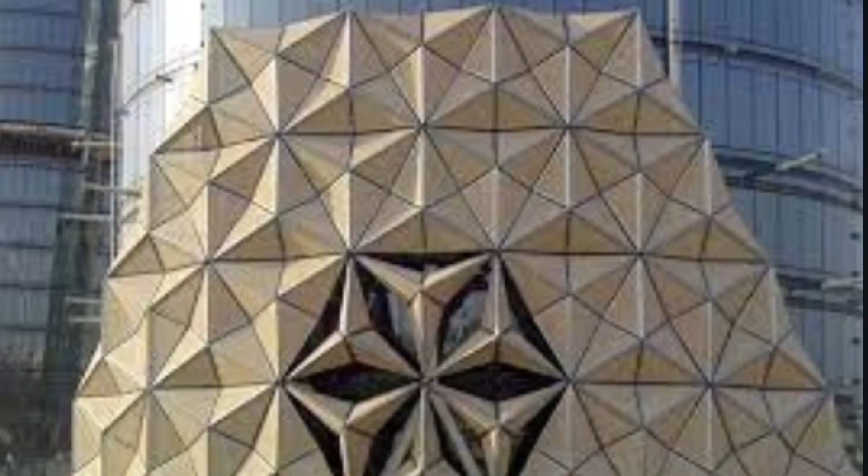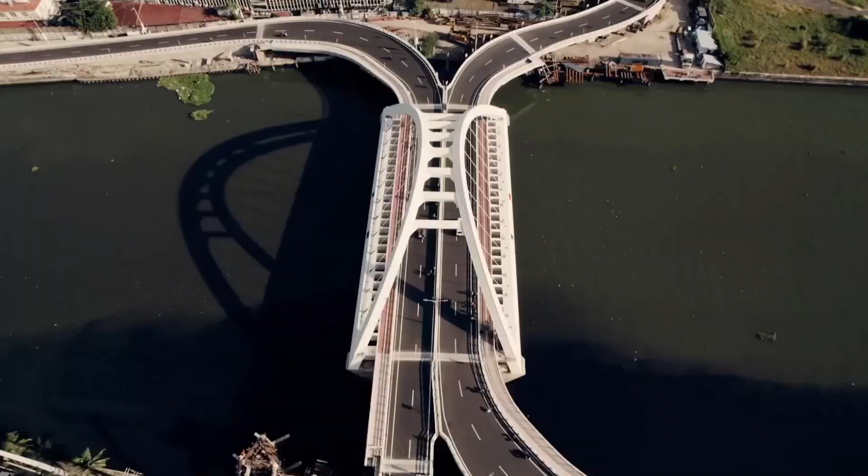The Philippines only has two seasons, dry and wet, and for almost half the year experiences drought and hot weather due to climate change and global warming. Scientists predict future changes will include warmer atmospheres, a warmer and more acidic ocean with higher sea levels, and larger changes in precipitation patterns. The extent of future climate change depends on what we do now to reduce greenhouse gas emissions. So we need to make our houses cooler for people to naturally live in extreme weather.

How do you ask? Well, did you know that these little guys are responsible for making buildings cooler inside rather than out?

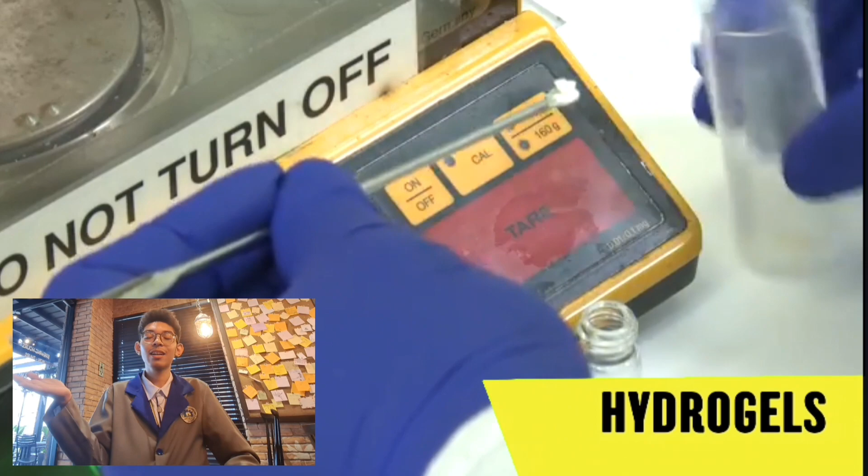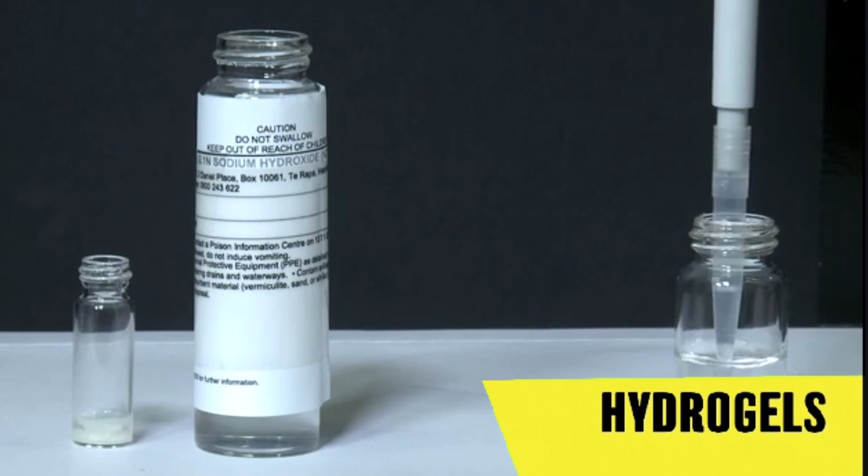These are called hydrogels, three-dimensional networks of cross-linked polymers that have been heavily saturated with water. When hydrogels are mixed into concrete, they can release the water they have stored to accelerate the curing process. This results in less volumetric shrinkage and cracking, extending the service life of the concrete.

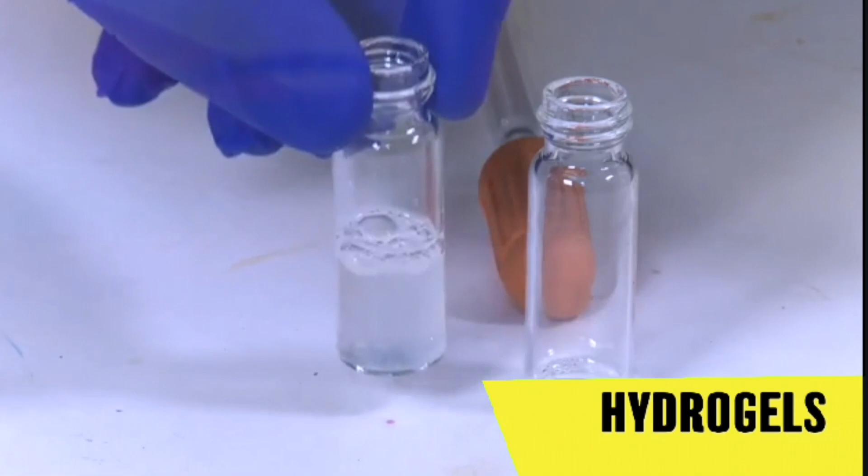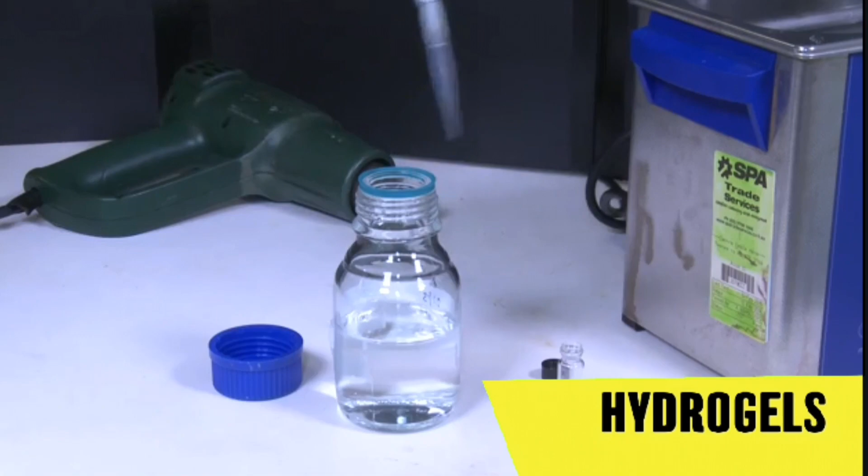Because hydrogels retain moisture, necrotic and infected tissues can be debrided painlessly, and full healing is gradually encouraged. They are suitable for wounds with low to moderate exudation because they have high water content and are not totally absorbent. These hydrogels are then used for constructing hydroceramic that is placed in place of cement in creating buildings.

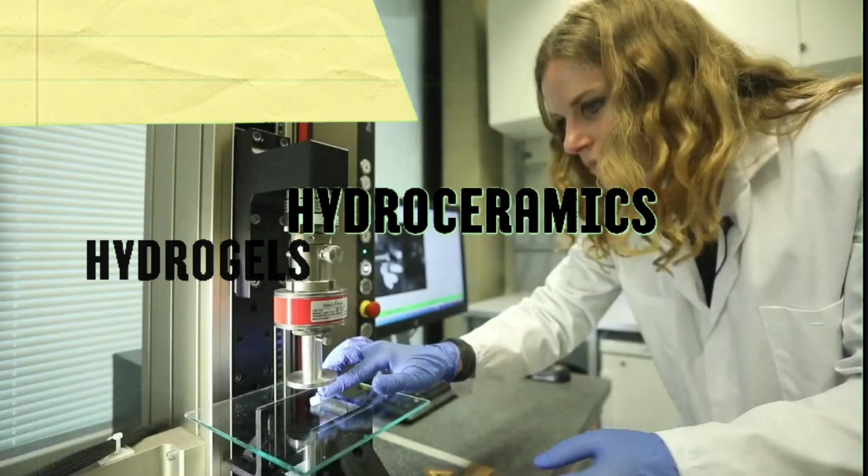When hydrogels are mixed into concrete, they can release the water they have stored to accelerate the curing process. The Hydroceramic project seeks to understand how hydrogel materials can be used to passively address thermodynamic processes in buildings. These materials include hydroceramic cement.

It is also a monolithic solid composed of concentrated NaOH solution and metakaolin. It is created by hydrothermally curing a combination of inorganic waste, calcined clay, vermiculite, Na2S, and NaOH with water.

Hydroceramic. Hydrogel is a polymer which expands in water to 400 times its volume.

Hydrogel is 98% water, so it evaporates and cools down the surroundings. As it loses water, it gets smaller and turns back to its original solid state.

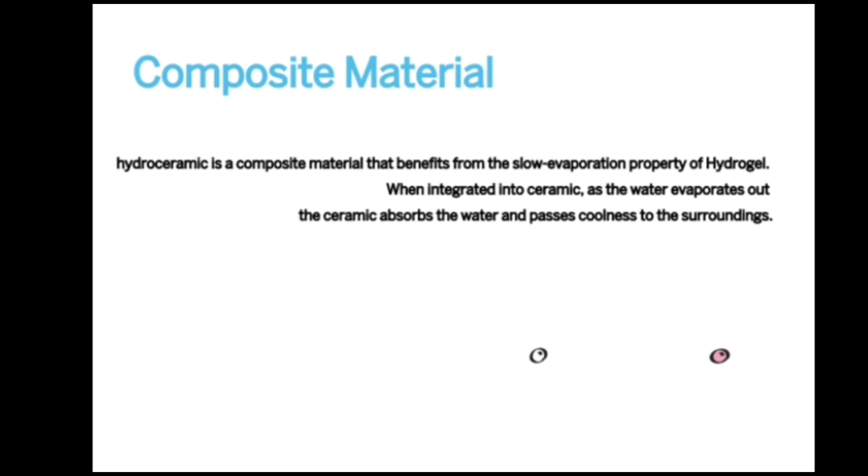Composite material: Hydroceramics is a composite material that benefits from the slow evaporation property of hydrogels. When integrated into ceramic, as the water evaporates out, the ceramic absorbs the water and passes coolness to the surroundings.

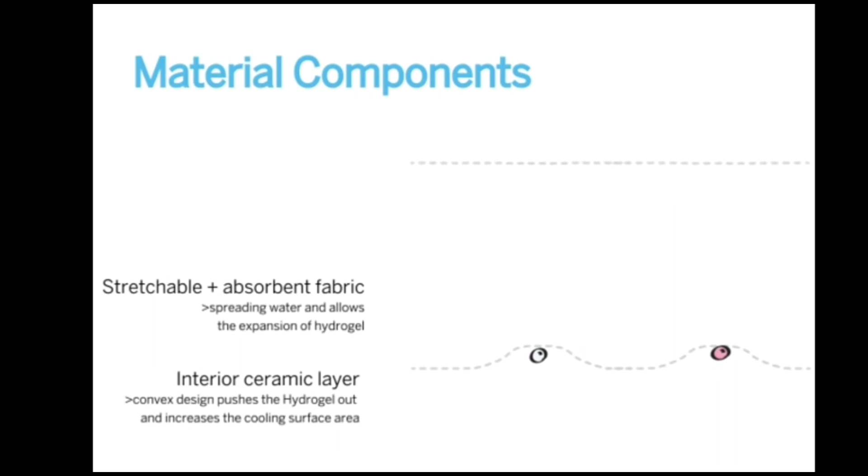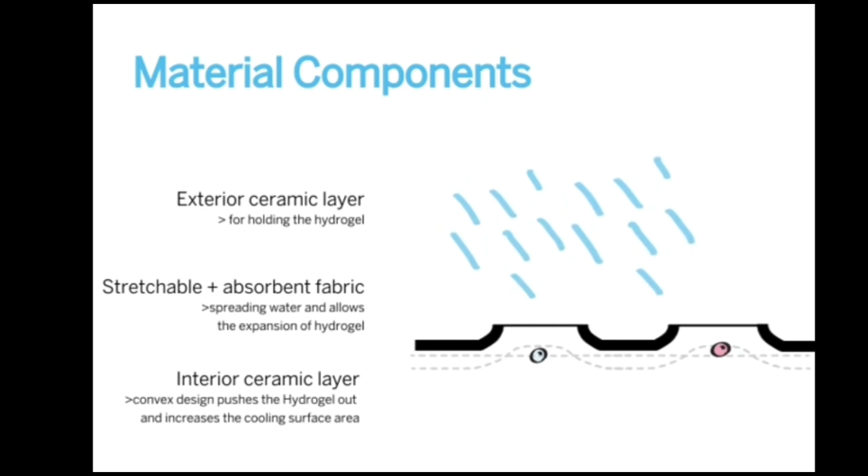Spreading water and allowing the expansion of hydrogels. In the exterior ceramic layer, it holds and folds, holding the hydrogels in place. Evaporation cools down the surroundings in combination with ceramic porosity, and hydroceramic performs as a cooling system for buildings.

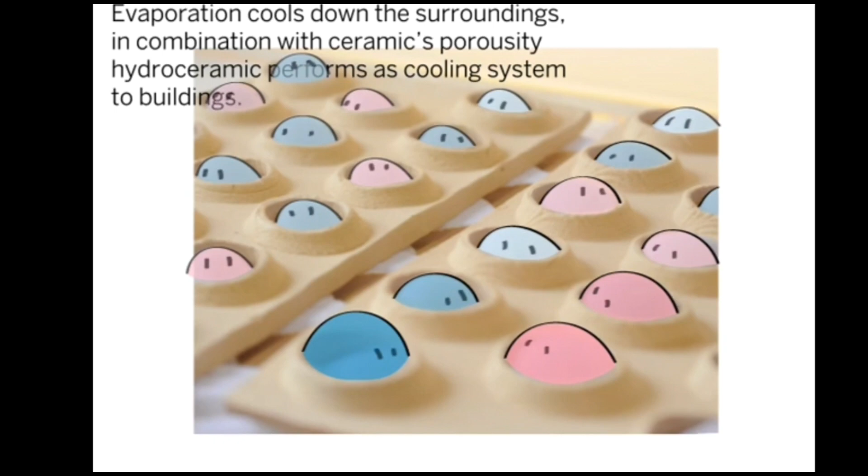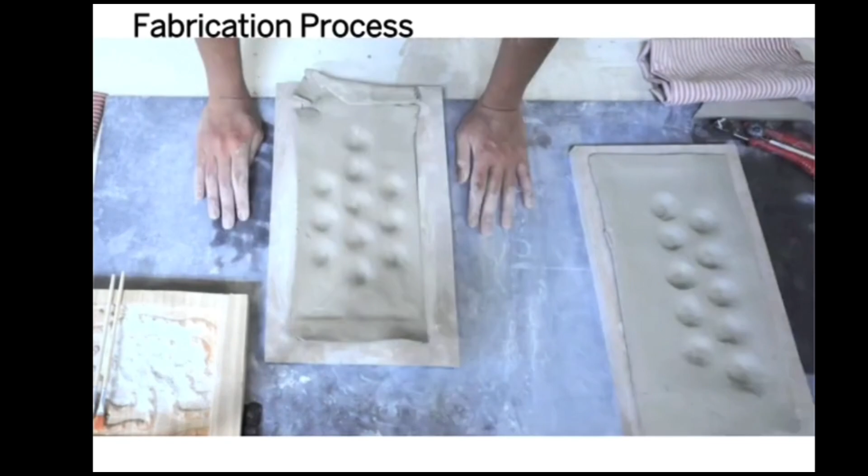These are some examples of the fabrication processes that the hydrogels undergo. It is then baked at 1000 degrees Celsius.

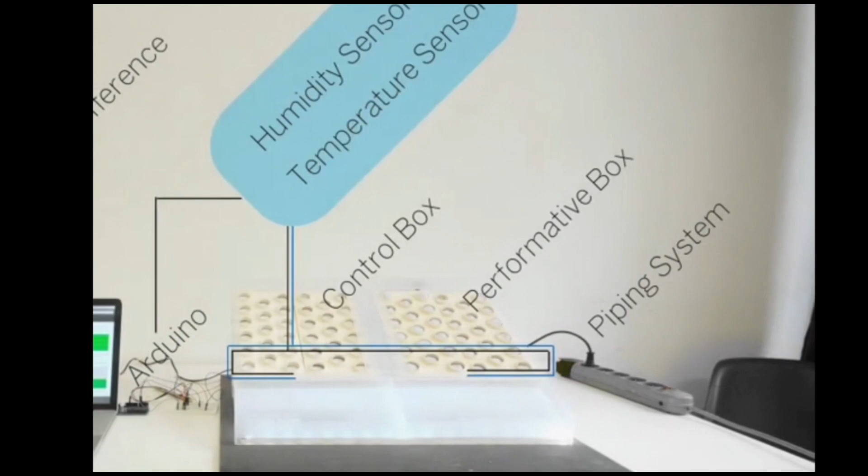It is then tested as a performative prototype versus the control group. Here you can see the different methods scientists use to measure or test whether the hydroceramic gels are capable of the hydroceramic process. Manufacturers also measure the humidity and temperature of the hydrogels, which are then graphed to differentiate whether the hydrogels are compatible for construction use.

Moving on to how engineers and scientists use the benefits of hydrogels.

Hydroceramic can take the place of air conditioning, which lowers the temperature inside by 5 degrees Celsius. Due to the hydrogel's capability to absorb water up to several times its weight, temperature can be lowered.

Researchers have found that the shape and chemistry of hydrogarnet crystals form at a high temperature, about 200 to 350 degrees Celsius, in cement-based hydroceramic materials with additions of alumina and silica. The hydrothermal C-A-S-H, or CaO, Al2O3, SiO2, and H2O.

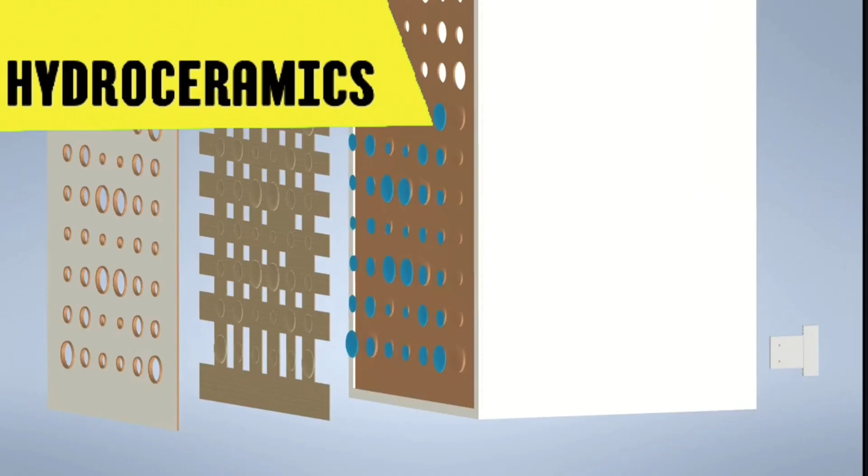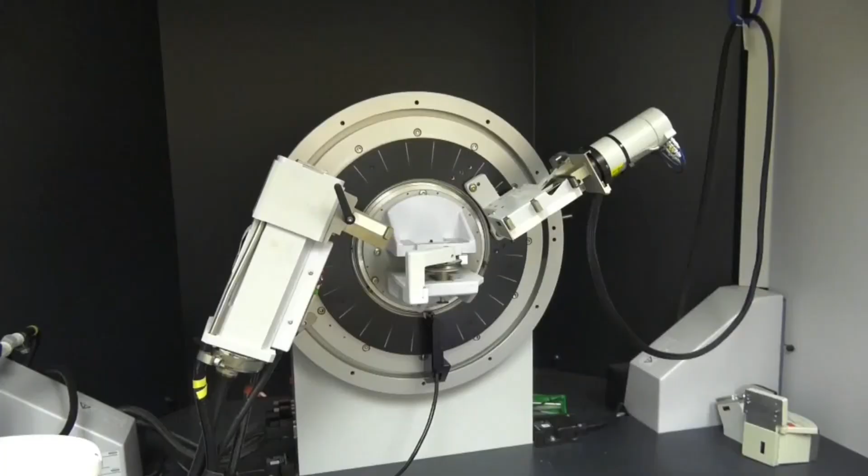X-ray diffraction or XRD data have been analyzed using the Rietveld method to determine the composition parameter Y. Minor elements including Fe, Mg, and S are present in the hydrogarnets according to electron probe microanalysis or EPMA. The hydrogarnet composition inferred from XRD was validated by EPMA data. It is seen in both octahedral and tetrahedral forms. Higher minor element concentration is linked to the tetrahedral shape.

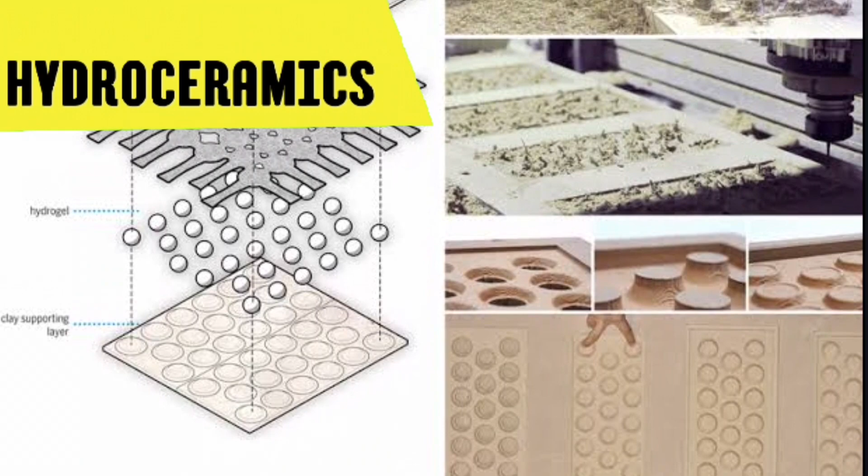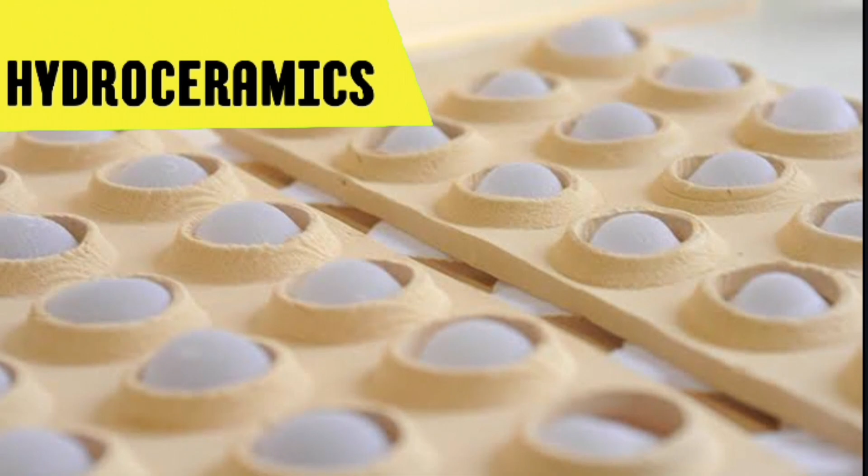In simpler terms, when the powder components are mixed with water, a hydration reaction occurs. The hydraulic calcium compounds react with water to form calcium silicate hydrate or CSH, and calcium aluminate hydrate products. Other calcium aluminate hydrate phases like CH and CASH can also form. The composition depends on the powder components and the activators used. These additional binder phases enhance strength and durability.

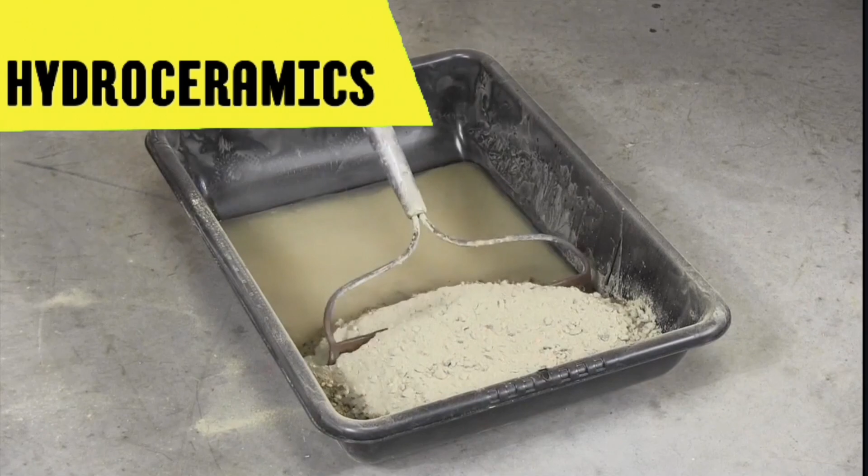Hydroceramics also contribute to the goal of the passive cooling technique, which is to reduce the summertime surface temperature and make cities feel cooler. The engineers created a porous ceramic passive evaporative cooling wall or PECW with a high capacity to absorb water for the cooling effect to work.

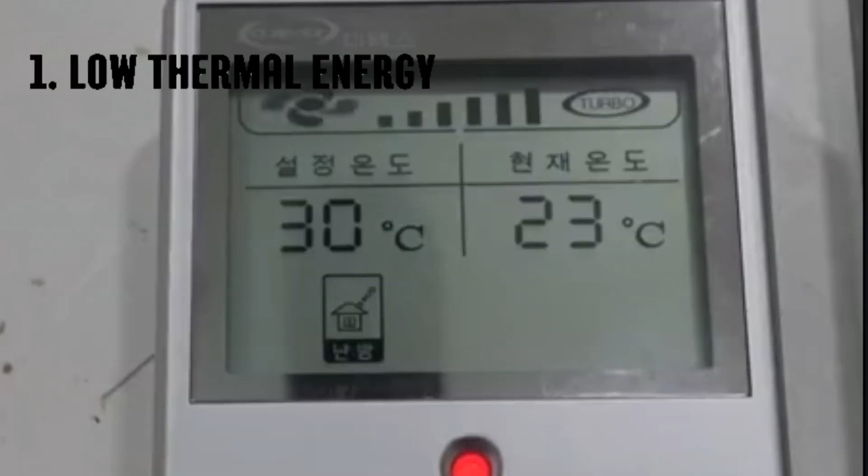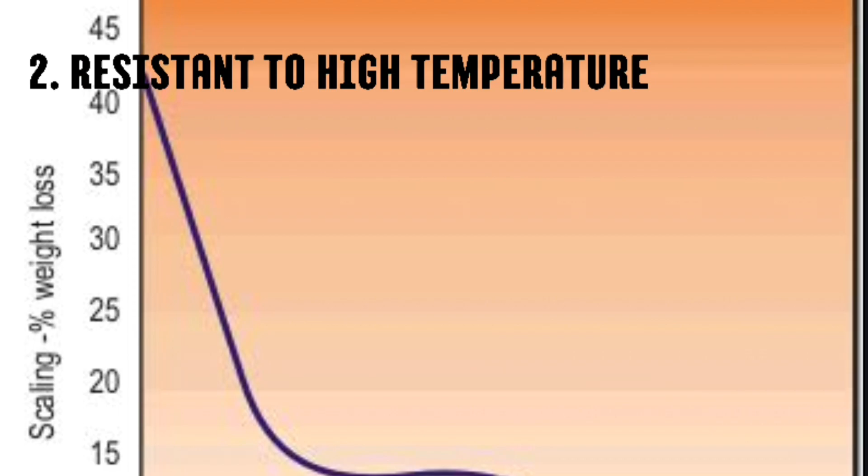Here are some advantages and disadvantages of using hydroceramic cement. Let us first go on to the advantages of hydroceramics. Number 1 is low thermal conductivity. Hydroceramic cement has a very low thermal conductivity, making it useful for insulating applications. This helps reduce heat transfer and energy costs. Number 2, it resists high temperatures. It maintains its strength and integrity even when exposed to very high temperatures over 1000 Celsius. This makes it suitable for applications like fireplace insulation.

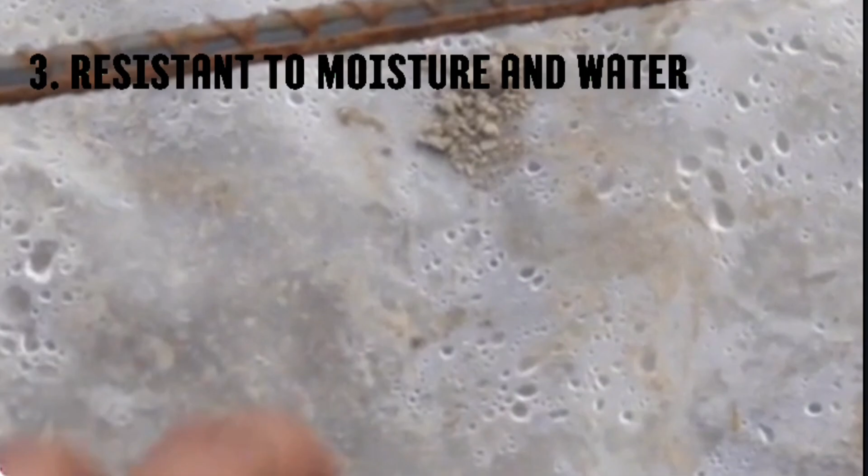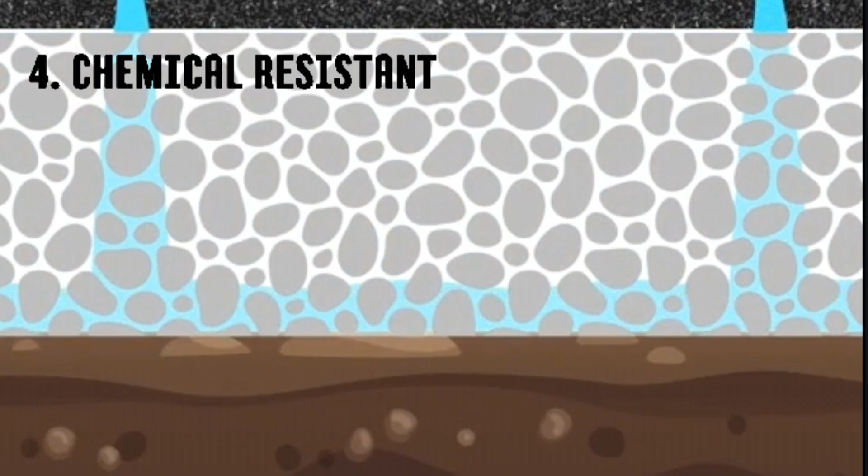Number 3, resistant to moisture and water. The hydroceramic cement is water resistant and does not degrade easily in damp environments. This durability makes it good for outdoor applications. Chemical resistance. It is resistant to degradation and corrosion from exposure to acids, alkalis, and many other chemicals. This allows it to be used in hazardous chemical environments. And lastly, low density. Hydroceramic cement is lightweight with a porous structure. This results in light construction and reduced structural loads.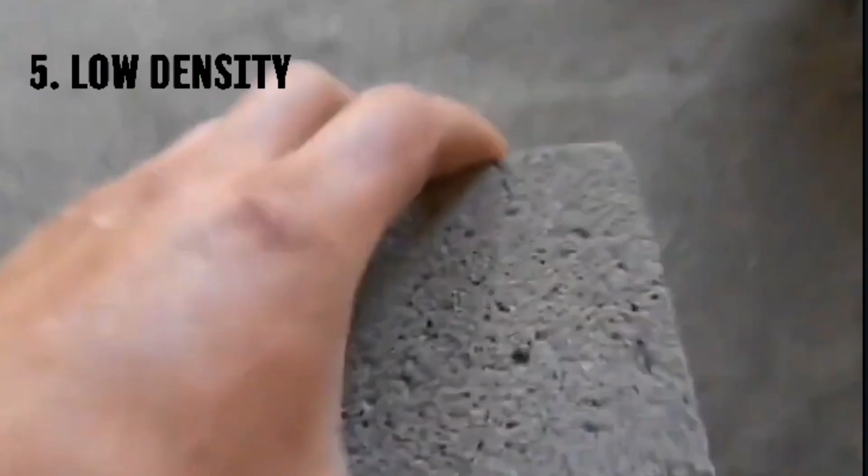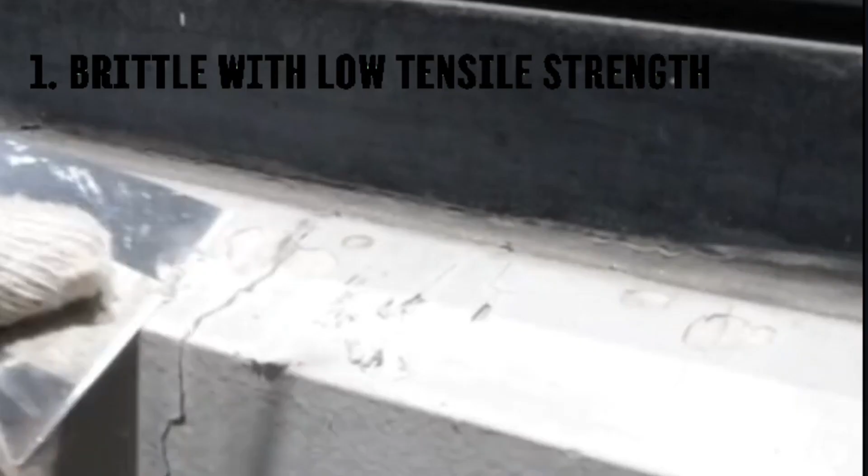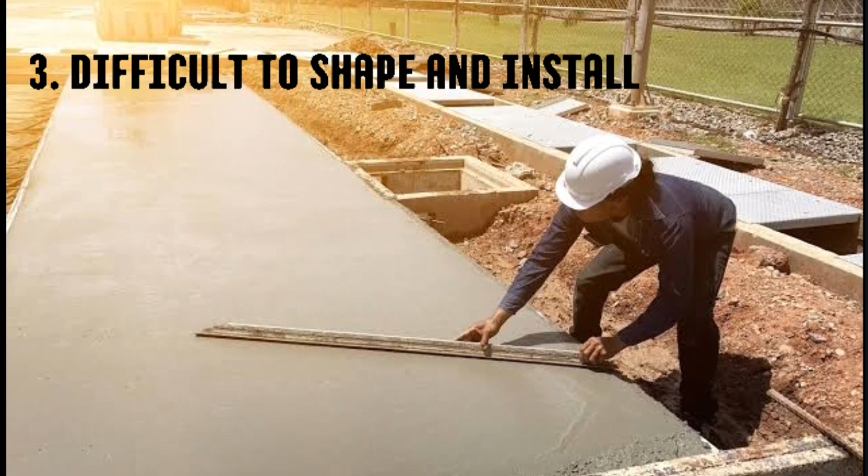Here are now the disadvantages of using hydroceramics. Number 1, brittle with low tensile strength. While strong in compression, hydroceramic cement has relatively low tensile and flexural strength, making it prone to cracking and breaking. Number 2, shrinkage during drying. Considerable shrinkage while the material is drying can lead to cracking unless properly accounted for. Third, difficult to shape and install. Hydroceramic products may be friable and break if not handled correctly during shipment and installation. Care needs to be taken. And lastly, high cost. Compared to traditional cement, hydroceramic cement tends to have a higher cost due to the specialized production methods required. This can limit applications.

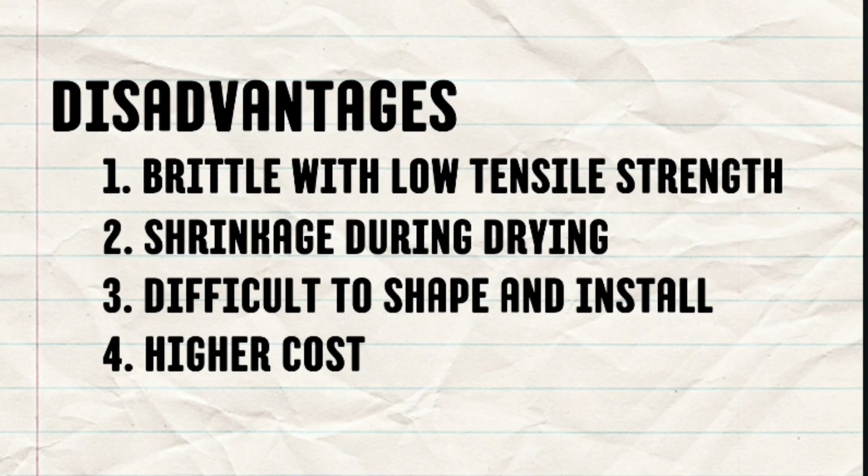There are actually other benefits of using hydroceramic cement other than cooling a building. Number 1 is high strength and durability. Hydroceramic cement can achieve high compressive strength, even higher than Portland cement concrete. The dense microstructure also provides excellent durability and abrasion resistance. Number 2, low shrinkage. The cement exhibits very low drying shrinkage, reducing cracking compared to Portland cement systems. This is due to the chemical shrinkage being completed in the early stages of the curing process. Number 3, chemical resistance. The cement matrix provides resistance to acids, sulfates, and other harsh chemical environments due to its low permeability and high alkalinity of solution. This makes it suitable for applications like nuclear waste containment and chemical uses.

Number 4, low thermal conductivity. Heat transfer is restricted across hardened hydroceramic cement, making it effective insulation. This helps maintain desired temperatures within buildings or other structures. Number 5, rapid setting. Hydroceramic cement can be formulated to set and gain strength rapidly. Unlike slower setting Portland cement concretes, this enables quicker construction turnaround times. And lastly, number 6, environmentally friendly. Since the cements utilize industrial byproducts like fly ash and slag, they can reduce the CO2 emissions associated with typical Portland cement production.